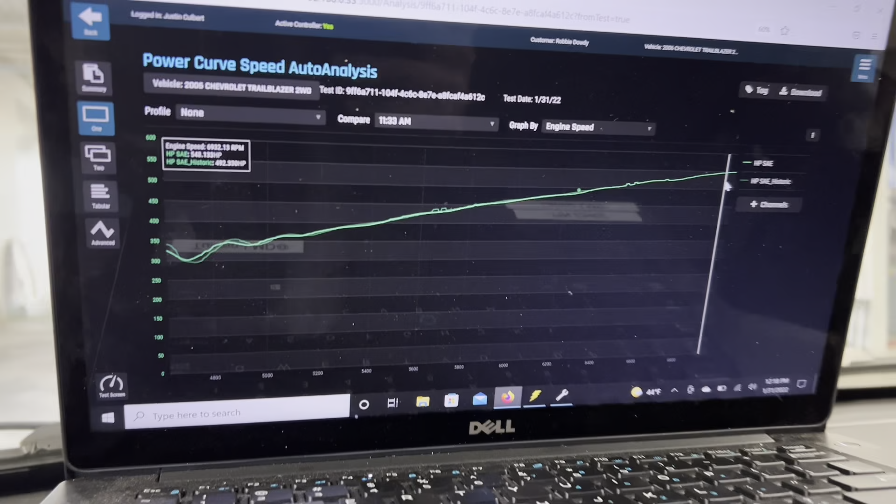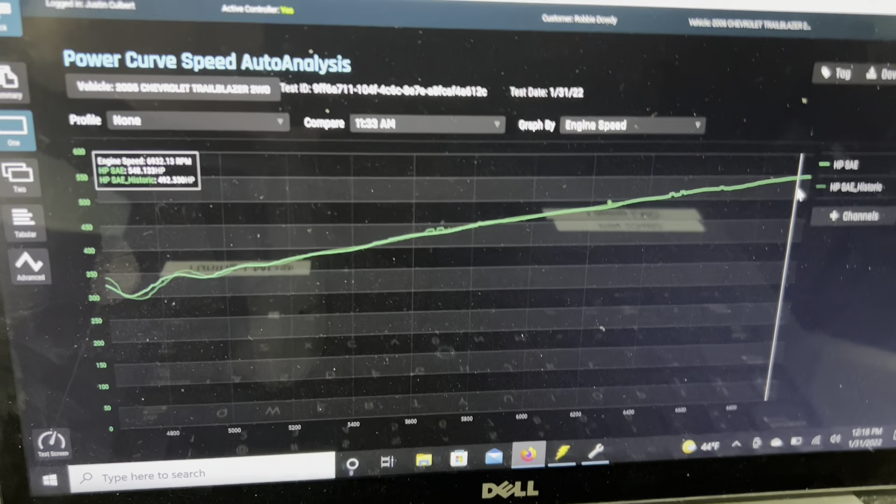All right guys, so we're making progress here. I've got the fuel pretty much squared away now. I pulled some timing out of it just to play it safe, but the fuel is pretty much dialed in. I don't think I got the dyno calibrated right because it's saying it's making 548 - I know it isn't making that much, but all we're really looking for is a comparison from run to run, just to see if we're improving. Things are looking pretty good. Now I've got 20 degrees of timing in it right now, and we're going to start putting a little more timing in it and see what that does. Let's get to it.

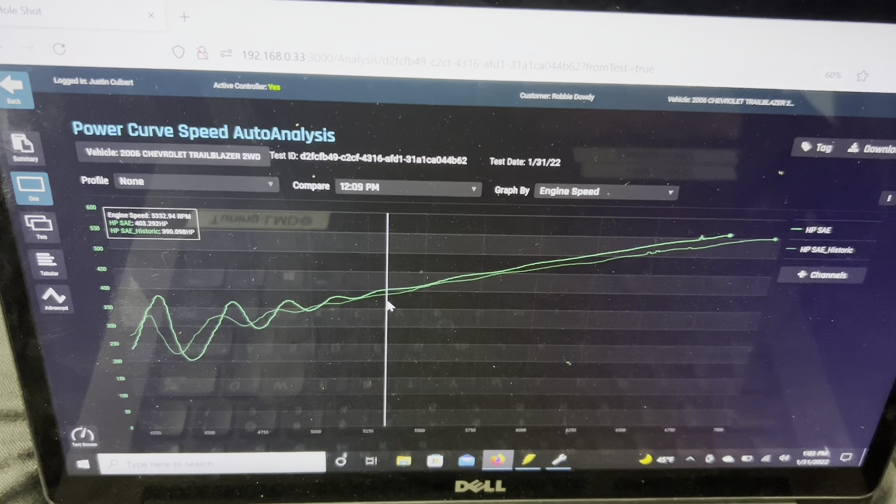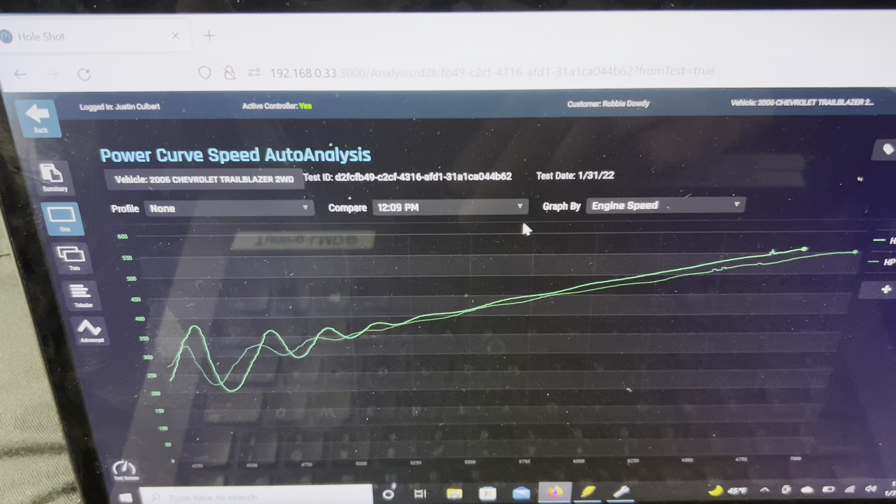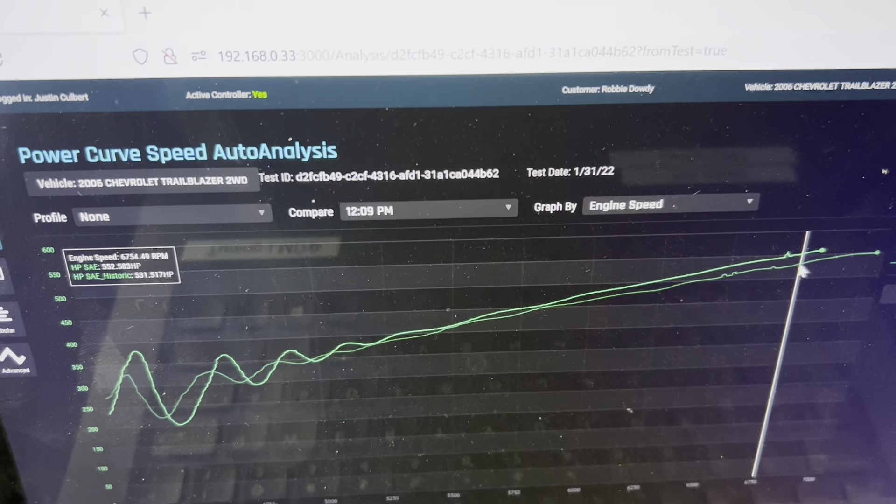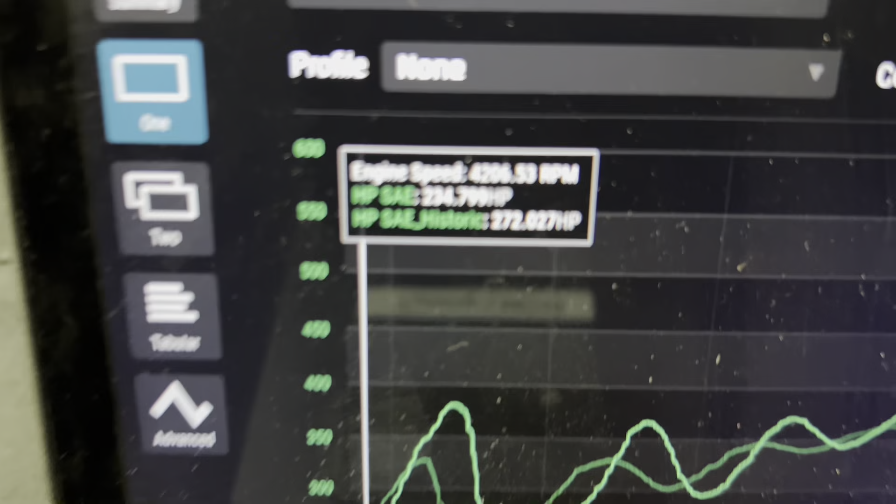All right, so we made a couple runs throwing 2 degrees of timing in it at each shot. This bottom line is with 20 degrees in it, and then we kept adding 2 degrees, so this top line is 26 degrees. Out here towards the top, around 6,700 RPM, we're definitely picking up some horsepower - about 20 horsepower up top. Again, I've got the dyno calibrated wrong, so don't pay attention to the horsepower number itself, but the difference between the two runs I think is pretty accurate. So it's looking pretty good.

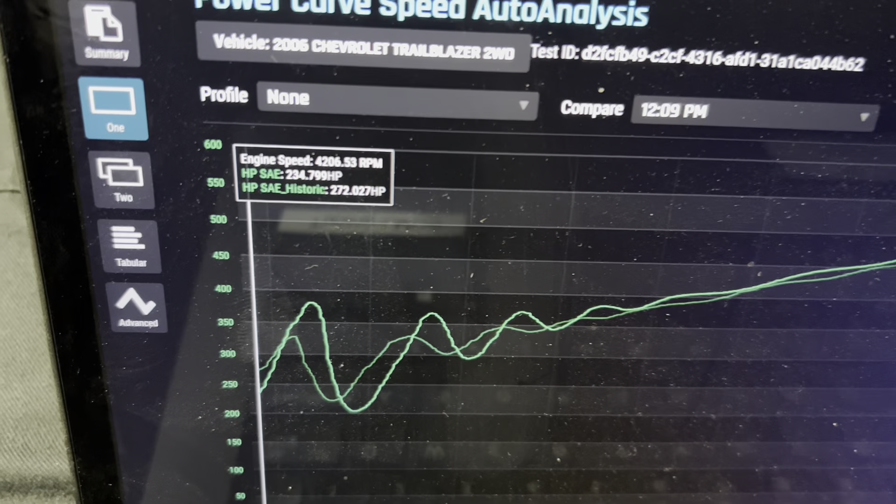I think I'm just going to keep throwing a degree or two on it at this point, to get it to its peak power where it's happy. Then I'm going to lean it up just a touch. Guys, I think this wide-open throttle stuff is good - we'll take it home and work on the drivability.

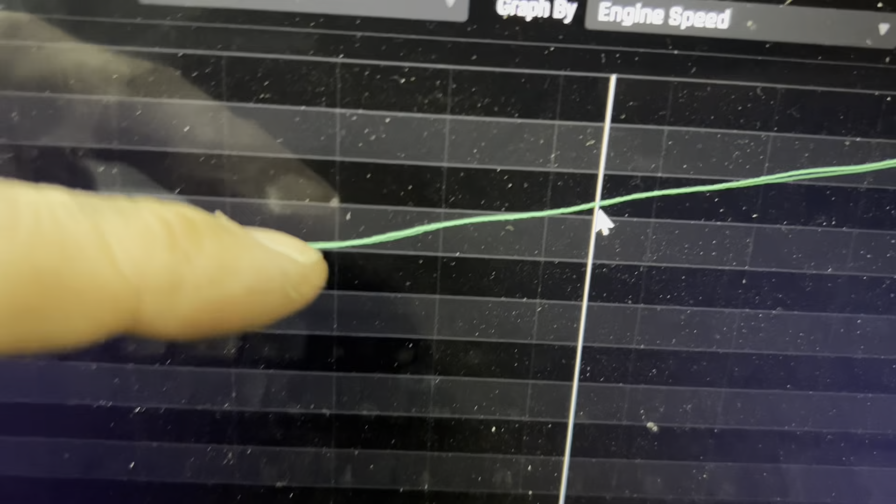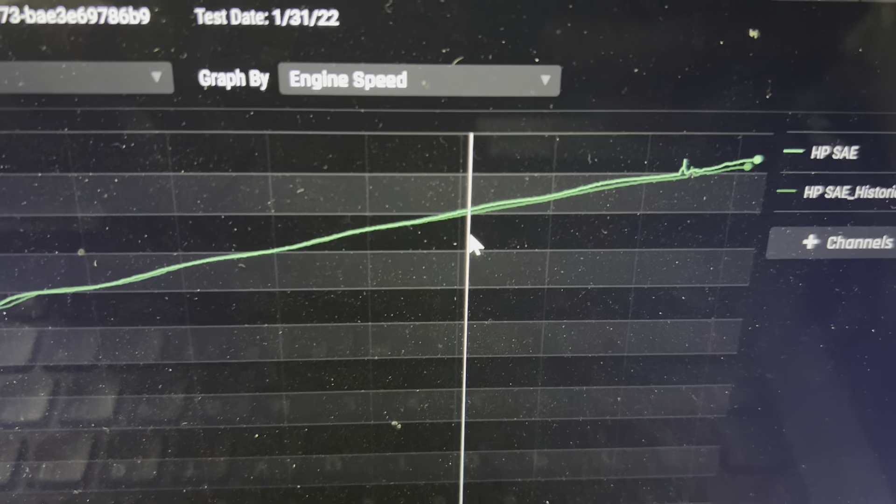So here's the difference between 26 and 28. At about 5,300 RPM, it picked up ever so slightly at 28, and once you get up around 6,200 RPM, the gains are a little more. So what I'll probably do is leave it alone down here at 28, and up top put a little bit more in it - we'll bump it up to 30, make a hit, see if there's any power there, and if not, I'll just put it back at 28.

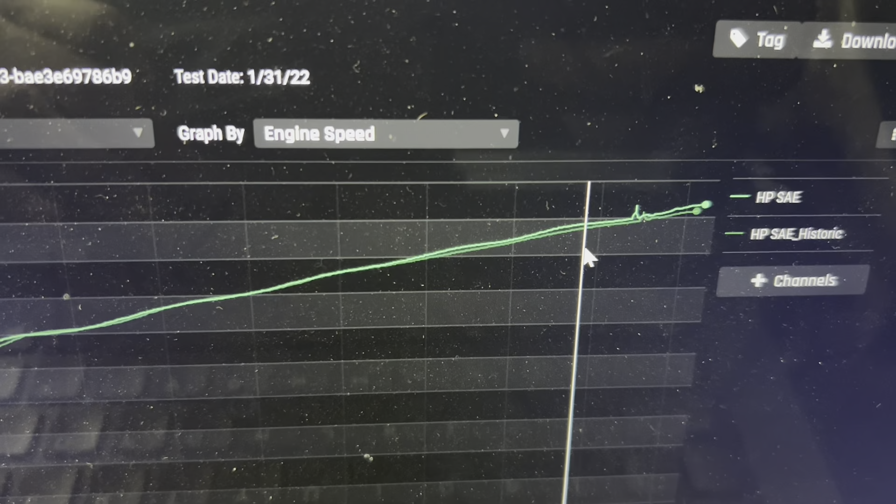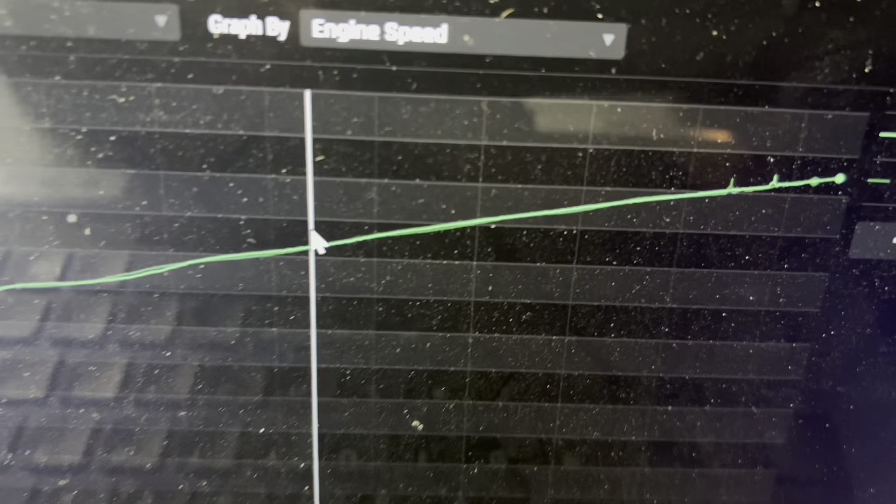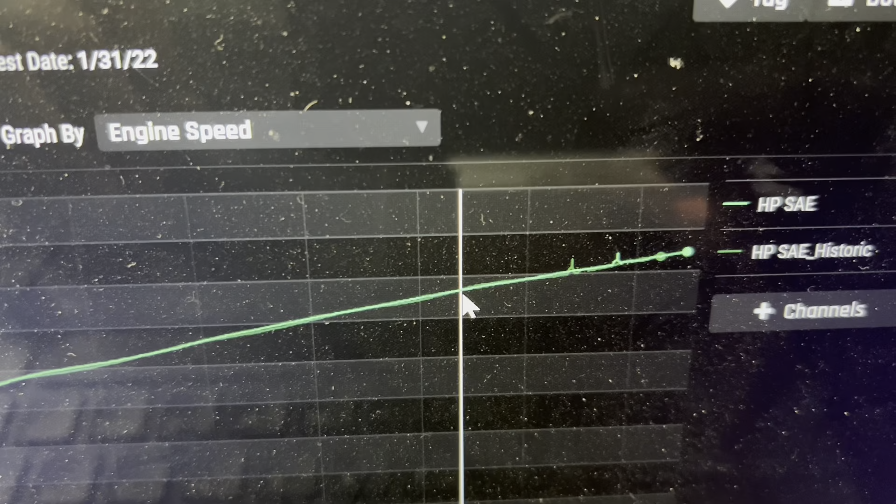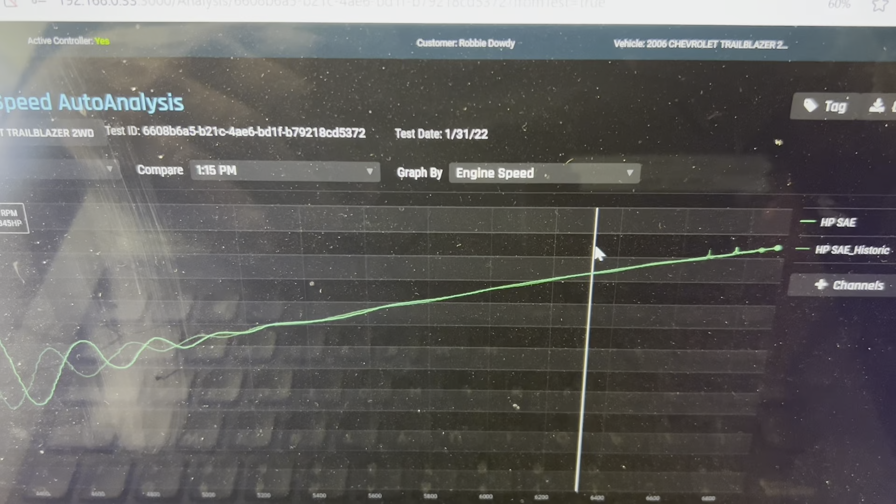All right guys, might be a little hard to see, but we did 30 degrees of timing up top and it literally gained nothing. So we put 29 in it, kind of mid-range right here, and it picked up like 3 or 4 horsepower. So I backed it down to 29 right here just to see if it picks up anything at all, and if not, we'll just run the whole thing at 28. But we've got that pretty much squared away now. Now I'm going to lean it up just a little bit to see if we pick up anything - I think right now we're at about 12.0, 11.8, 12.0, so I'm going to bump it up to about 12.5 and see if anything's to be had there. Let's pull some fuel and see what happens.

Guys, I'd say that's a pretty successful dyno day at New Late Model Domestics, so got to give them a huge shout out. The Trailblazer did pretty good - very, very proud of it. Time to get it home and start working on the drivability, because man, I am way off on the tune as far as that goes. But we'll get it sorted out. In the meantime guys, hope you enjoyed the video. CTSV content coming very, very soon because we're wrapping that up as we speak. Until then guys, appreciate you watching.